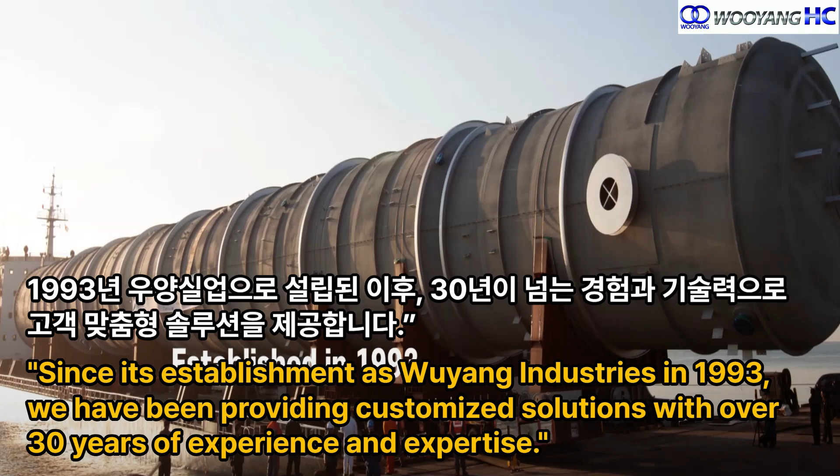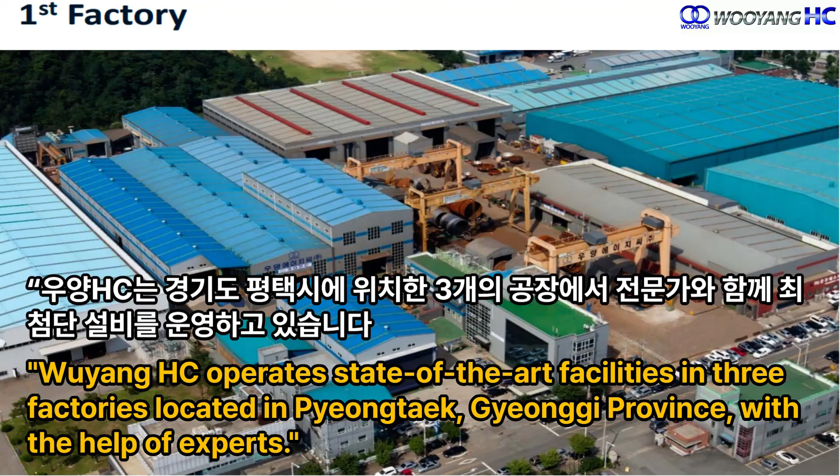Wooyang HC is a trusted global company in the plant equipment sector. Since its establishment as Wooyang Industries in 1993, we have been providing customized solutions with over 30 years of experience and expertise. Wooyang HC operates state-of-the-art facilities in 3 factories located in Pyeongtaek, Gyeonggi Province, with the help of experts, with a total production facility of over 190,000 square meters, including Factory 1, Factory 2, and Factory 3.

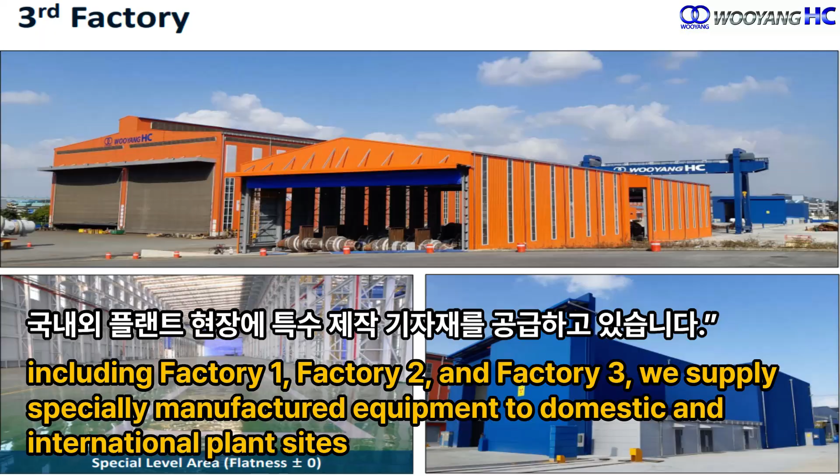We supply specially manufactured equipment to domestic and international plant sites. We have established global trust by securing domestic and international certifications, such as listing on the KOSDAQ, obtaining ASME U3 certification, and registering with Lloyd's Register Class 1.

Additionally, we have proven our quality and delivery capabilities by being recognized as an excellent partner by world-renowned companies, such as Chevron Phillips, Bechtel, and JGC.

The competitiveness of Wooyang HC can be summarized in 3 points. First, industry-specific custom manufacturing capabilities. We provide tailored designs, optimized for on-site conditions such as pressure vessels, heat exchangers, and piping spools.

Second, precision machining and high-quality welding. We ensure accurate dimension management and welding quality with our in-house factory equipment.

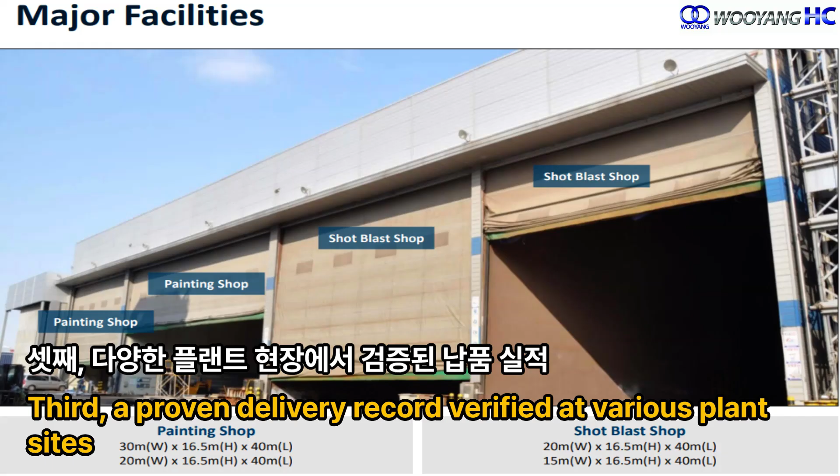Third, a proven delivery record verified at various plant sites. We provide problem-solving capabilities based on field experience from design to installation and operation.

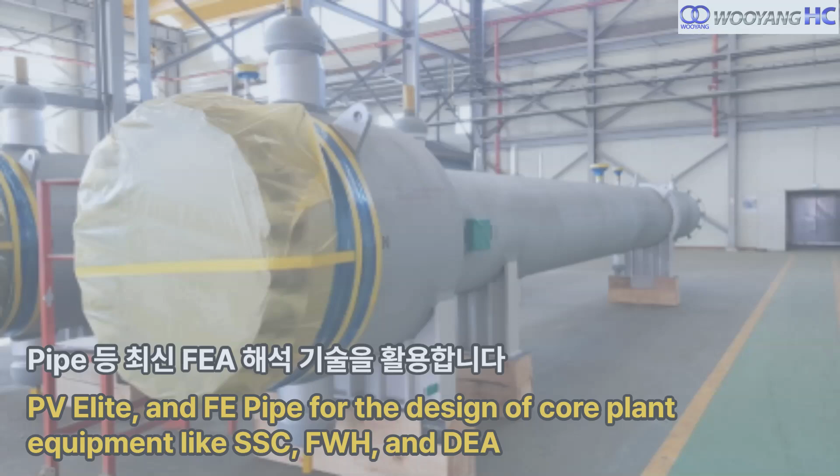Wooyang HC utilizes the latest FEA analysis technologies such as ANSYS, PV Elite, and FE Pipe for the design of core plant equipment like SSC, FWH, and DEA.

Our production capacity is 30,000 tons per year, with the ability to manufacture up to a maximum diameter of 10 meters, a length of 110 meters, and a unit weight of 3,200 tons.

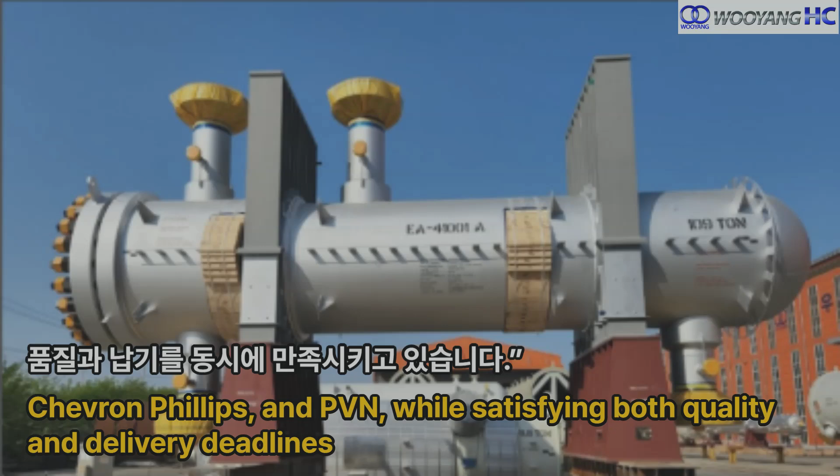We manufacture special materials and ultra-large equipment in various fields such as chemical plants, energy plants, and eco plants. We are executing global projects such as Cameron LNG, Chevron Phillips, and PVN while satisfying both quality and delivery deadlines.

With certifications including ISO 9001, 14001, 45001, and ASME U2, U3, and PP, Wooyang HC provides customized plant solutions that ensure safety and reliability.